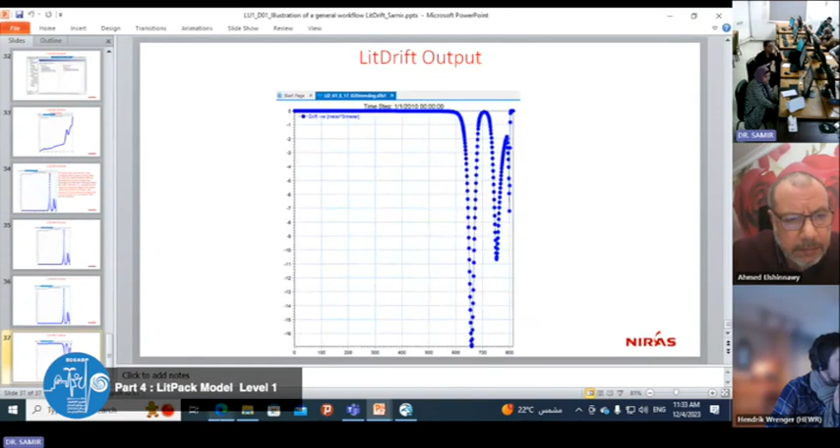Henrik, are you available now? Yes, sir. Great. Can you start recapping your previous session and then start our session today? Yeah, I guess. Oh, I can hear again a very strong echo. I will stop the voice. To be honest, I didn't prepare any slides on the recap part. I saw it in your agenda, but I thought you were sort of recapping the entire session 1, to be honest. So I can of course recap it, but how should we best possibly do it? I could look at the slides again.

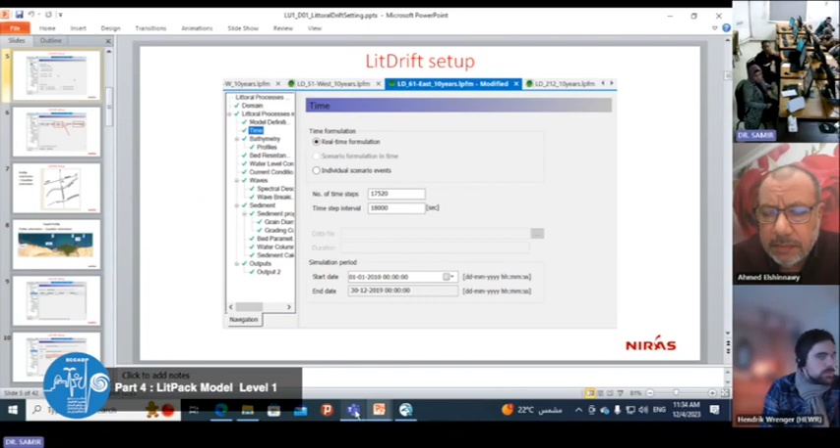Yes. But I am also referring to what I presented in the first session because it was a general overview, right? And now we're picking the elements that we need for today. So, yeah. I think I will just add a few words in the beginning of my presentation, recapping my previous session without looking at the slides again. That's okay, fine. Please go ahead. Okay. Okay, I assume you can hear me and see my screen and the little cursor. Otherwise, please let me know. I can see a thumbs up.

Thanks. My contribution to today's sessions will be to zoom into the cross-shore sediment transport in the context of the LitPack toolbox and the profile evolution tool. There was also a question last time how to then actually extract the cross-shore transport from the model, and that's exactly one of the outputs that is available from the tool that we're looking at today. And I'll just present a little bit the underlying equations and point out a few parameters.

Introduction, then the table generator, which is one step in the model. I'll get back to that in a second. The quasi 3D model simulation of sediment transport in one point, which is the core of this whole profile evolution toolbox, but also the littoral drift that you guys just looked at with Samir. The profile evolution, and again, a handful of references. So introduction, and I'll get back to the recap in a second.

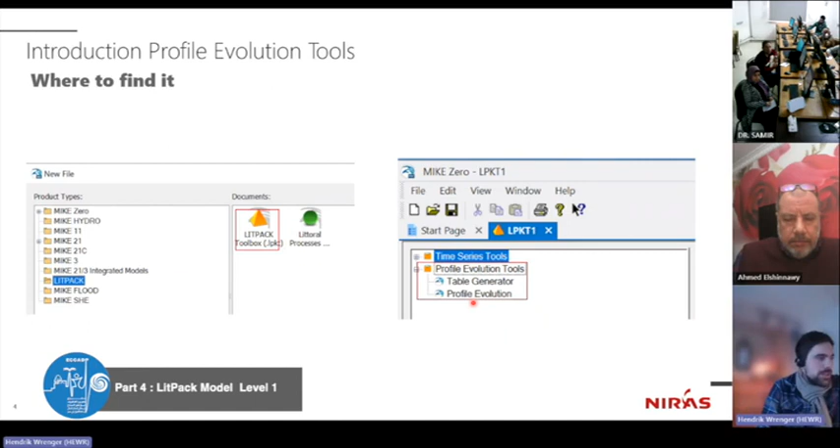So what I'm looking at, just to sort of show where we are for the content of this presentation, that's in the LitPack toolbox, and then the profile evolution tools consisting of the table generator and the profile evolution on the user interface side. So the application: last time I gave a general introduction to hydrodynamics in the coastal area, the wave transformation, the currents and the water level setup, and they all are interacting, right? The wave transformation was, for example, leading to the water level setup, and also the wave transformation during the imbalance in radiation stress was leading to longshore currents.

And after, we discussed that a fairly big step in modeling sediment transport, both in the longshore and cross-shore direction, is actually to describe these hydrodynamics across the coastal profiles. And once that first step is completed, and that needs to be done in all the models dealing with the littoral transport processes, the hydrodynamic conditions are resolved, then the sediment transport is actually modeled, like the suspension of sediment from the bed and the transport of that suspended sediment, as well as sediment transport on the bed.

And we discussed there's two fundamentally different transport processes considered: the one is a cross-shore transport, and the other one is a longshore transport. So the application of the profile evolution tool: it models the cross-shore profile changes based on the wave conditions and actually also water level time series. Typical applications are the storm profile response or the response to beach nourishment.

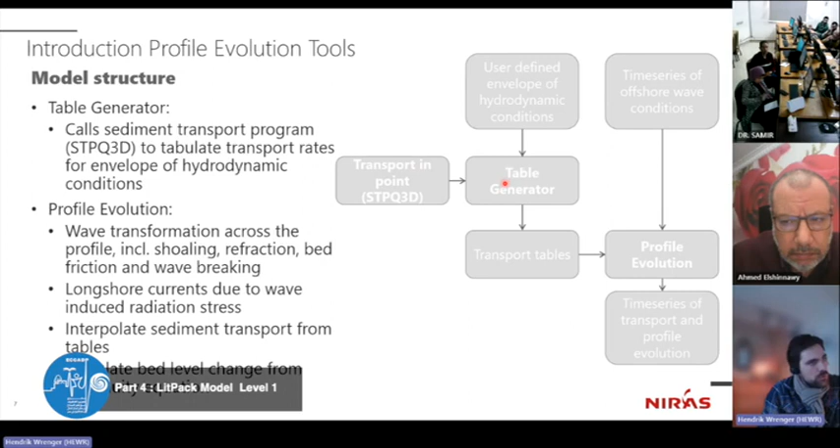And then it does not compute the transport, but it just interpolates the sediment transport from the tables that we already computed. And then finally, it calculates the bed level change from the continuity equation. And now for the remainder of my presentation, I want to go through these three components.

So we start with the table generator, and you'll see I'll do a bit of a mix of equations and also GUI screenshots to just show some parameters where they are in the GUI. But the screenshots that I'm presenting of the GUI are not necessarily step by step of how you set up a model, because we have a lot of sessions that are more concerned with these hands-on examples of how do you actually set up a model. I try to put it in an order that makes most sense, hopefully, in terms of the concepts behind it, and then where you can find the parameters.

So the table generator. Now in that flow chart, we're looking at this guy here. As said before, to reduce the time for simulating the profile evolution, the rates of the sediment transport are tabulated for various combinations of the input. The tables are generated by successive calls of the transport in a point model, and transport tables are input to the profile evolution.

So because that is so, there is actually no direct interface for the user to set up a transport in a point model. In the MIKE toolbox, you won't find an item transport in a point model, because it's only called by the table generator or by the LITDRIFT that Samir just presented before. So that means all the settings of how the transport in a point is computed are defined in the setup of the table generation.

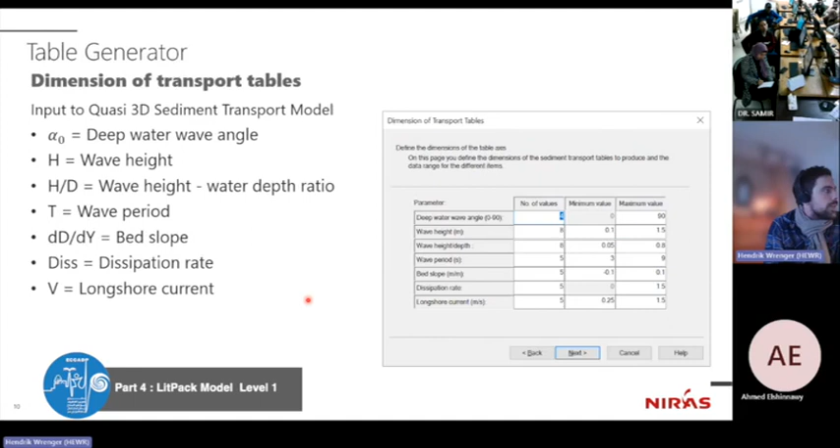And then the output. And now I jumped over quite a few things in the table generator, because we'll get back to that when we look at the formulation for the transport in a point. Then we look at all the other settings that are needed for that model in that context.

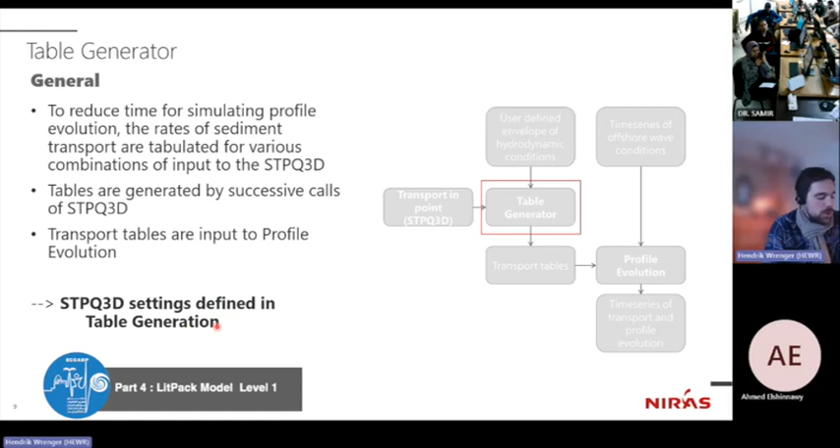But the only other setting you need to do in the table generator with regards to the overhead, as I called it, are the output definitions. These are the cross-shore transport and the long-shore transport tables. So they contain the sediment transport capacity in solid volume rates for each combination of the parameters that we defined before.

And the solid volume rate, we will hear that again later. It's just important to keep in mind what quantities we're actually looking at. That's more like a workflow thing, but you just need to recall that these tables will be needed in your next steps, so you save them somewhere in your workflow where it makes sense, to call them again in your profile evolution simulation.

And now we come to the quasi three-dimensional sediment transport model. So it's a core. It's that guy over here that's called by the table generator. And it's a core of the sand transport modeling in combined waves and currents. And it is actually also called by the LitPack FM modules.

So it models the temporal and vertical variation of the shear stress, turbulence, and flow velocity in one point. And then, as we will see a little bit later, you call that model along multiple points along your cross-shore profile to then get the cross-shore profile of transport rates. But here within that model, we're only looking at one point.

And recall that right now, when the table generator calls this, it doesn't matter where we are on the profile, right? Because we just call it for an envelope of hydrodynamic conditions. If I have a wave height of 1 meter with this incident angle and at that water depth to wave height ratio, then my transport is this and this. What the profile looks like and where I am along the profile is not a concern at that step here.

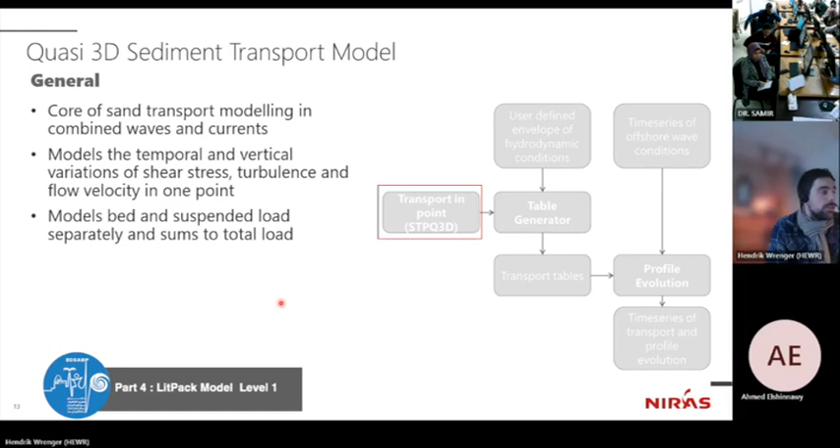And the model models the bed and suspended load separately and sums it to the total load. The concepts of bed load and suspended load were also something that I mentioned on the first day. So the vertical velocity profile, the time average flow velocity, U bar, is found from the force balance equation. So we have the fluid density, the viscosity, the gradient of horizontal velocity over Z, so the vertical profile of the horizontal velocity, and that's balancing the vertical profile of horizontal shear stresses.

We assume a no-slip condition at the bed, and the forces include the contribution of the near bed wave orbital motion, the wave breaking, and the wave setup. And that's the average flow velocities.

And by the way, just from the manual, the vertical resolution of the numerical grid where that force balance equation is solved uses a log spacing for the first 10% of the water column, Z over D, where D is the water depth, and then a linear spacing for the rest. And there is a formulation, I didn't put it here, that chooses the grid resolution based on the sediment conditions. You can read about that in the manual, but usually you just go with the defaults.

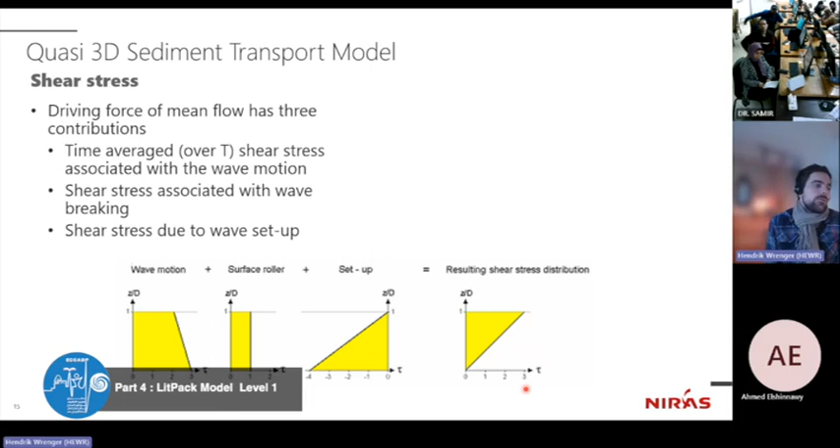And then we have the resulting shear stress distribution, which is shown here. And that is basically the input or the left-hand side of the force balance equation, which is then numerically solved for the distribution of the mean flow. And then we had in the force balance equation the eddy viscosity or the turbulent viscosity, this term here, and that eddy viscosity has a couple of different contributions.

So internally, we will get different instantaneous thicknesses of the boundary layer and also different instantaneous friction velocities over the wave period, because it's also changing directions. And you can imagine that a boundary layer develops and then the flow is returning. So the boundary layer is destroyed and then it has to develop again.

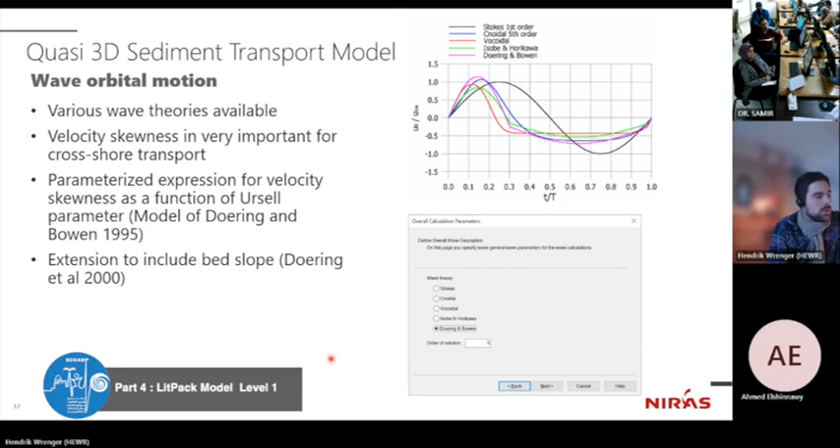And then finally, the actual output that we're interested in is, of course, the sediment transport. So after the hydrodynamics in the water column have been resolved, the sediment transport is computed as the bed load and the suspended transport, and then the total transport is the sum of the two.

For shingle-sized material, only the bed load is computed, and for sand, which I assume is most relevant along the coast of Egypt, both the bed load and the suspended load are calculated. The bed load is calculated from the instantaneous Shields parameter. I didn't put the formulation here, but you can find it in the scientific documentation if you're interested in

further reading. The Shields parameter, we recalled that in my first slide, was an indication or parameter for sediment movement as a force balance between the impacting force on the sediment and the resistance of sediment particles. And the vertical variation of the suspended sediment concentration is calculated from the vertical dispersion equation, which is quite a well-known formulation from any sort of spreading models.

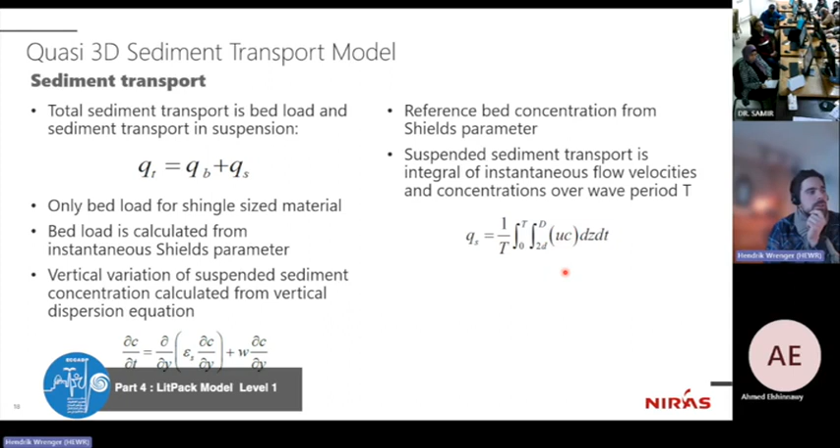You also have the opportunity to model graded sediment. The uniform sediment, as the most simple input, is solely described with a median, there's an N missing here, sorry, grain size D50. So the Shields parameter, etc., refers to that D50. But we can also describe the sediment by a log normal grain curve as a function of D50 and a geometrical deviation.

And the geometrical deviation is the square root of the D84 and D16. And it's presented here at the top right for different geometrical deviations.

So the larger the geometrical deviation, so the larger the ratio between the D84 and D16, the larger or the more flat the grain size curve.

So it is also a good idea to look at these sieving curves and to get some local samples at the beach where you're modeling, and then from that, using some engineering judgment or maybe some sensitivity tests, you will have to choose how you represent your sediment in your model.

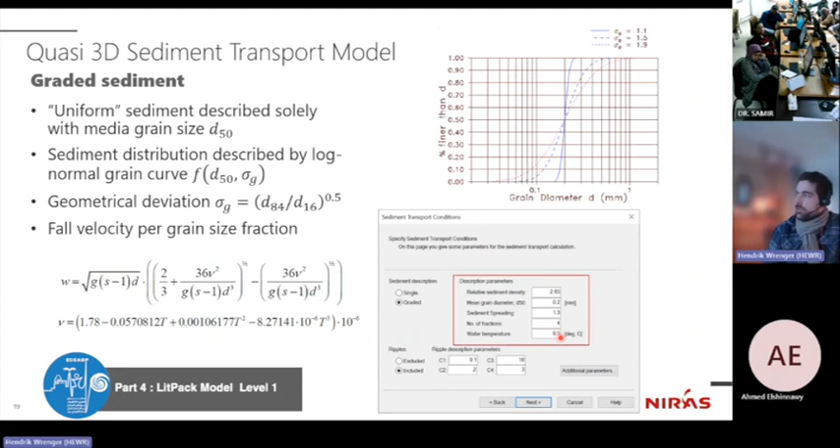And the viscosity, again, depends on the temperature. Hence, you're putting in the water temperature here at the bottom. That will have an impact on the viscosity, which will have a small impact on the falling velocities, and hence how much will get into suspension.

And this is the formulation that's used when you use a graded sediment. Shown here as an example, D1, D2, D3, D4 are the discrete sediment fractions that you're considering, which in this case are coming into suspension. Based on the maximum ratio between the maximum friction velocity and the settling velocity of each sediment fraction, it is decided if that fraction is coming into suspension or not.

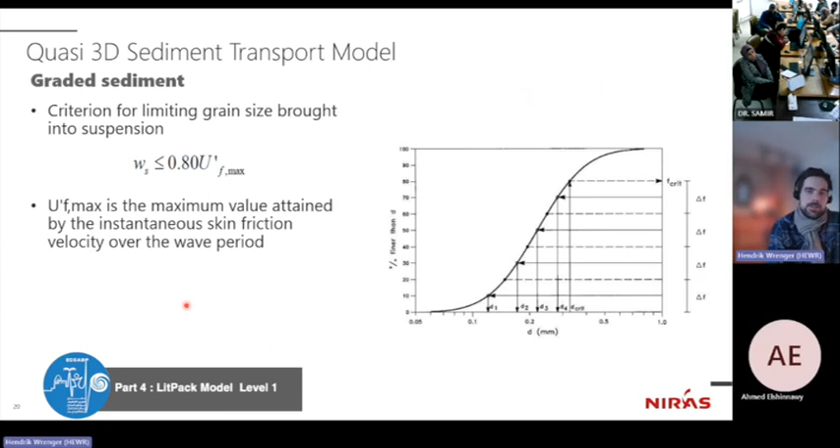And with that, you can also define a critical particle size. That again is computed instantaneously. So there might be some suspension for some fractions of the sediment for some part of the wave and not for other parts of the wave, and then it's integrated again as shown before.

Another parameter in the context of sediment transport, which usually you don't really change, but just to mention where it comes from, is the critical Shields parameter. We looked at the Shields diagram on the first day, and the critical Shields parameter is a function of the Reynolds number, but here in the model it's actually a user input, usually set between 0.04 and 0.06 with the default 0.045, and the 0.045 is exactly that plateau where the critical Shields parameter is constant for the high Reynolds number regime.

And now we come to the profile evolution tool as the last main section of this presentation. Just a recall, we've now looked at the table generator tool. In the table generator tool, you define the envelope of conditions and where to save the output, and you also define all the parameters used by the transport in one point, because the table generator calls this transport routine several times to build the table.

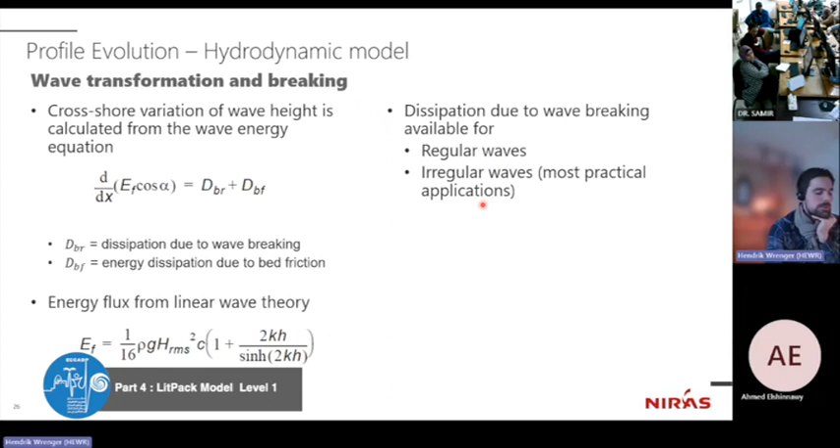For the breaking waves, the Battjes and Janssen model is used. And the dissipation, we recall that this dissipation was an input to the calculation tool and was the production term of turbulent energy due to wave breaking in the turbulent eddy viscosity term.

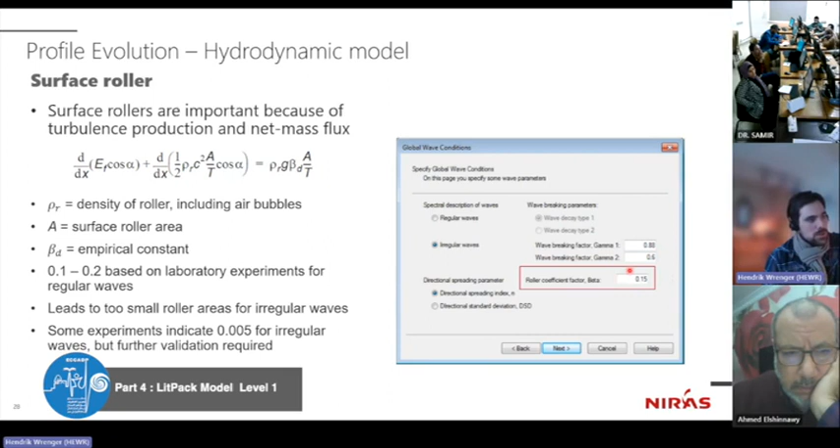but that leads to too small roller areas for irregular waves. So for irregular waves where you have the directional spreading, etc., these areas where you have the whitewash are much larger. So the energy or dissipation is spread over a much larger area. And then some experiments indicate, that's from the manuals of DHI, that 0.005 might be adequate for irregular waves, but no strong data set exists to really choose that. But you need to keep in mind that this default 0.15 is for regular waves.

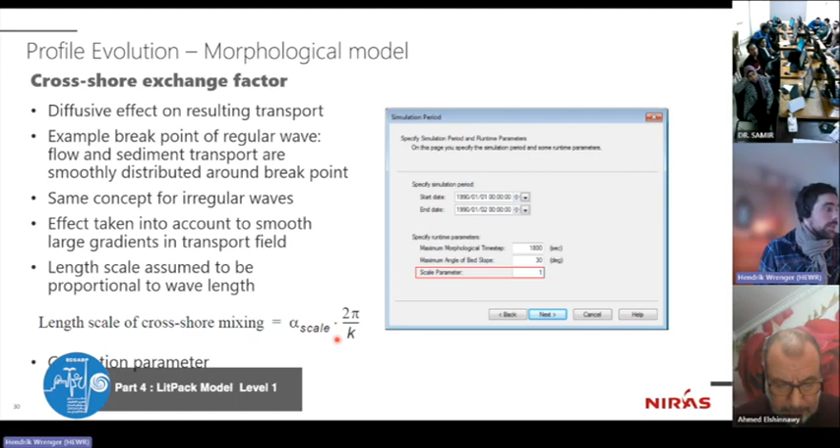visible to alpha. And the last comment on this is it's even more like a self-reinforcing phenomenon, because if you then have this steeper bar developing, that will also in the next time step have an impact on the hydrodynamic model and the hydrodynamic conditions that you compute. So it will lead to more concentrated wave breaking, and more concentrated wave breaking will then again lead to more concentrated cross-shore sediment gradients, and it will self-reinforce this effect.

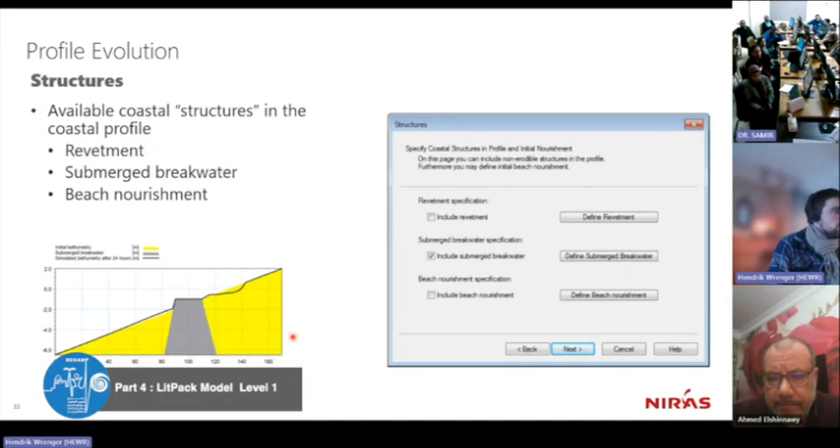Thank you, Hendrik, for your great presentation. Are there any questions about the theory? I know that the theory and the equations are a little bit complicated and not nice for engineers. But if you go deeper into this theoretical background, you can understand which value and what is the effect of every calibration factor.

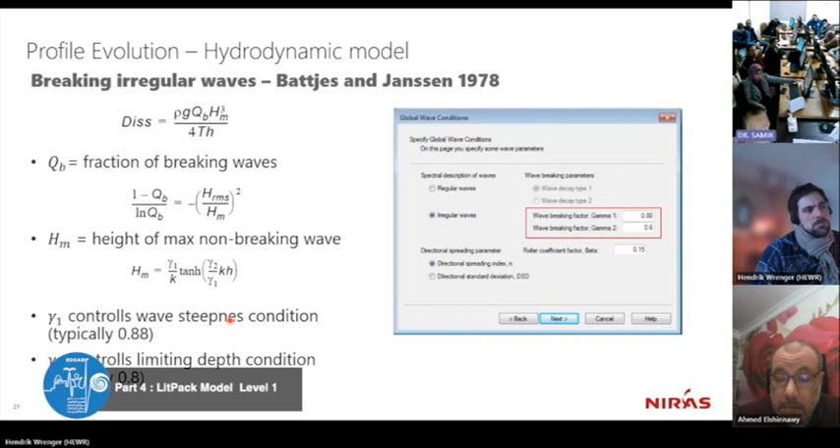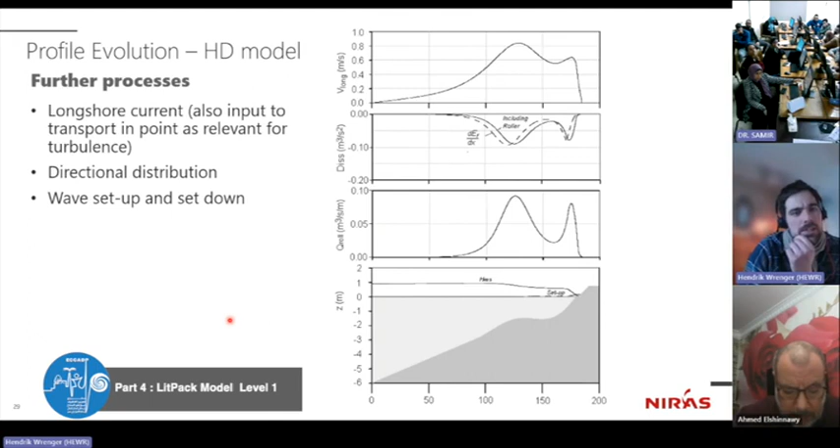He thinks that this LitPack profile usually takes the sediment from the upper layer, the upper near shoreline, to always form a sandbar. He thinks so. I'm not sure I get the question. So are you saying that the LitPack tool has a tendency of forming a bar, although you don't see that in reality?

Yes. Okay. Well, then the alpha that we looked at here would be one tuning parameter where you could smooth out the bar that you're forming and distribute the material along the profile. Another parameter would be the wave breaking coefficients, and yet another would be to question if you're using the correct sediment properties, and finally if your description of offshore wave conditions is correct.

But to answer your question generally, it's a bit difficult. I've not generally experienced that it's always generating too much of a bar. Where you experienced that, how did you come up with your input profiles, and especially the bathymetry towards the shore and the shore face?

Excuse me, can you repeat your question? The question was to your student, sorry, I didn't catch the name, who experienced a problem with the bar development that he thinks is unrealistic. I just meant it's a bit hard to judge it in general terms. So I just made a few suggestions where you could adjust his parameters.